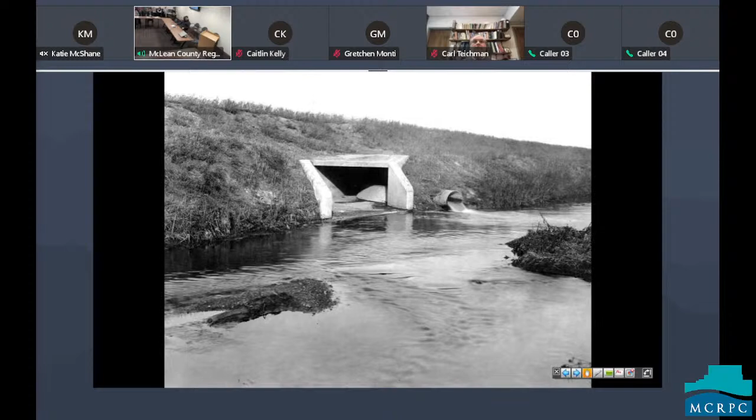So, as I said before, in the teens, Bloomington and Normal sanitary sewers discharged to Sugar Creek. You can see right here, that is raw sewage going into Sugar Creek. This is the overflow that would run when there's a storm. So that's normal sewage, and then this large pipe is a stormwater overflow.

How did I do that? I didn't know that.

Cool. So that's the combined sewer overflow, and that's how the sewers in town discharged to the creek. So the interceptor sewers that the district started building in the 1920s intercepted all those discharges. The combined sewer overflow stayed open. Next.

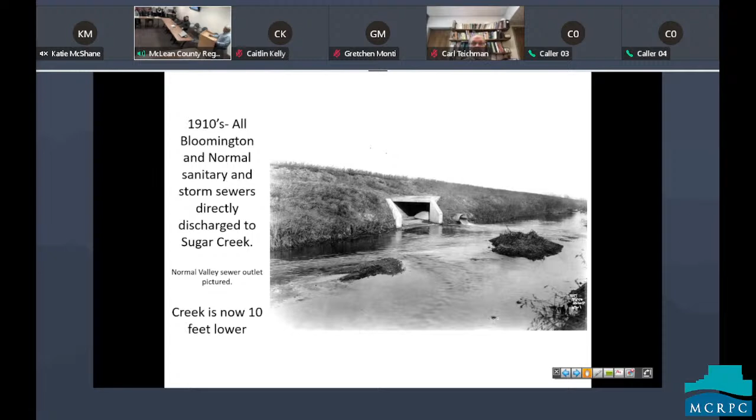So the district was formed under the Sanitary District Act of 1917. There are many districts in the state of Illinois formed under this act. Champaign, Urbana, Decatur, Springfield come to mind, but there's quite a few more. It was formed by a court order in 1919. People downstream of this community got tired of all the stuff that was in Sugar Creek, flowing past farms, and people, quite honestly, were getting sick.

There were about 200 people that died from disease in the 20s in Bloomington because there were discharges into the creek above the water supply in Bloomington and Normal. The water supply in Bloomington Normal is at about Division Street. You know where the water department is? They had a well there. Normal had one just upstream on the other side of the creek. And you had the hospital and everybody upstream discharging in the creek. So there was an outbreak, not 100% caused by that, but it was contamination of drinking water, cholera, and typhoid fever.

So in 1919, the district was formed. 4 referendums. I think on the 4th referendum, the district was formed and a bond was passed. And if they didn't pass that 4th one, the mayors of the 2 communities might be going to jail. I mean, they were threatened with jail time.

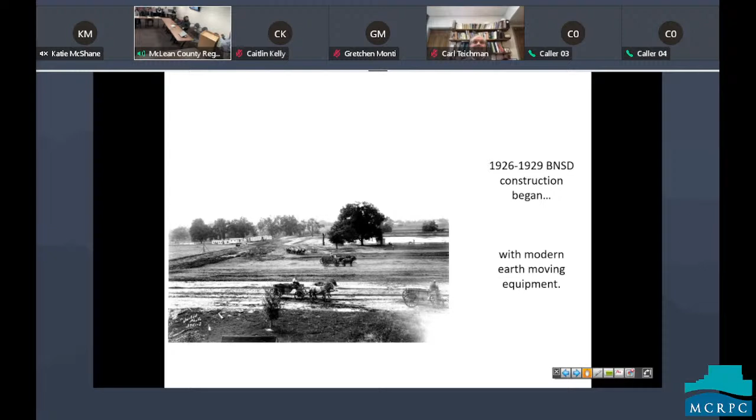1926 to 1929, we constructed a plant, modern earth moving equipment. Seriously, we got a boatload of pictures that show all the handwork that went in there. The concrete, it's incredible what those people do. Go ahead. Today, there's an 80-acre site in the West Plant.

The plant is divided into the old trickling filter plant, which we call Plant 1. There's a Plant 2, which is solids processing, and Plant 3, which is a third plant. This was the 20s, 40s, 60s, 70s, and 90s. And there's a little dab in there from 2007. This plant is capable of 22.5 million gallons a day on a daily basis, treating wastewater.

It treats wastewater, everything west of Veterans Parkway. In a storm, it can handle 45 million full treatment. And we can do an extended treatment to another 42.5. That's before we push it into the 80 million gallons. So just over 90 million gallons can run through, or 87 can run hydraulically through that plant.

There's 3 stages of treatment: primary, secondary, tertiary, and advanced disinfection on the tail end of it. And a lot of that's going to get bulldozed. I'll get into that in a minute. Next slide.

In 2000, construction was started on a plant down off of 700, which serves everything east of Veterans, just about. It's a 7.5 million gallon plant. It's got plans for expansion to 15. Cost $60 million, roughly. And at that time, that was the most expensive public works project funded by the local economy to date. You know which one was before that? The 1926 construction of the West Plant.

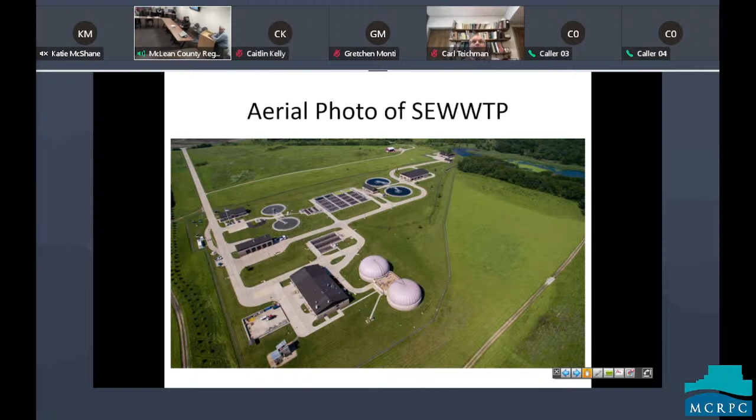A lot of milestones. So the first plant was 5.5 million gallons a day, 1926 and 1929. And at that time, the district established sewer use ordinances for Bloomington Normal. Now it's required by US EPA. We converted that 2-stage plant into a 3-stage and added disinfection and tertiary filtration. It's kind of like taking the 4-cylinder engine on your car and putting a 6 and then an 8 and then supercharging that engine.

So the district currently has capacity for full treatment daily average flow of 30 million gallons a day. Design max is double that, 60. So chlorine used to be a tool used for disinfection in the creek. Before this, we used gaseous chlorine, but it's a lethal gas, and it's a weapon of mass destruction used in World War I. And it does great. It kills all the germs. Not so good on the fish in the creek either.

So in the 80s, we got an exemption from using chlorine. By the way, chlorine is a very dangerous thing to handle at a plant. Whenever they're changing out tanks, you have to have 3 people that are masked up in SCBA equipment and ready to push the panic button if they get a leak, because it is bad stuff. So we got rid of the chlorine and then replaced it later with UV disinfection.

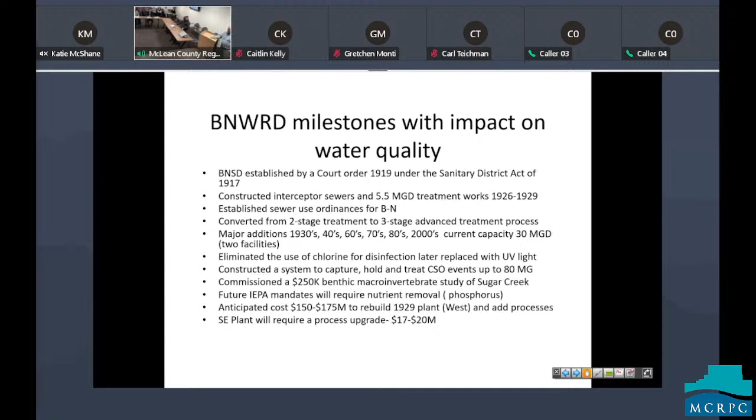Next slide. So we serve about 140,000 people, residential, commercial, and some stormwater. Industrial contribution is pretty small. It's about 3% of the total load. Got a high number of restaurants on this facility. That means grease. And we have 2 universities and colleges. And honestly, ISU and Wesleyan, when they're in, they're good for about 1.5 million gallons a day. So we do see it spike.

People have asked me, during the Super Bowl, when the commercials come on, do we see a big flush at the top? No, we don't see it. It takes too many factors to get there. Next slide.

So the user fee, this was last year's numbers. You pay $7.43 for the first 2,000 gallons of treatment, and then $2.06 per 1,000 gallons. And this is of the potable water consumed. I don't know what your water bills are running, but the BNWRD fee on the bills is 15, 16, 18 bucks a month. The fees just went up Sunday, I think, May 1st. And I think, don't hold me to this, but I think Tim said it was 5%. A big part of that is planning for this construction of the new, well, it might be 7. So it might be 30 cents a month, 35 cents a month more.

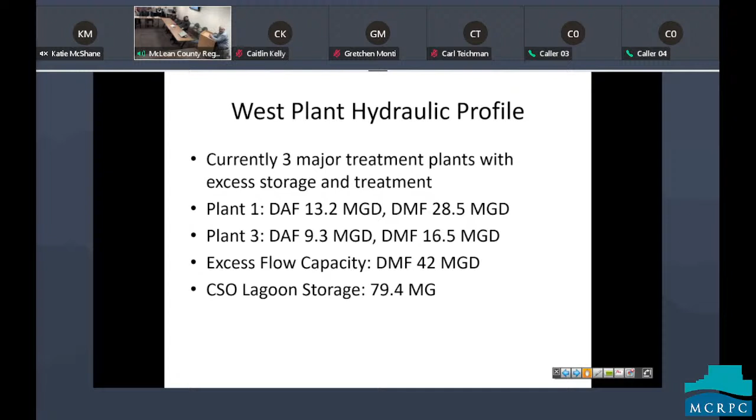Next one. Did you identify where the lagoon is? Pardon? Did you identify where the lagoon is in town? The lagoon is on West Washington.

Excuse me, right here.

So we have rules and regs to follow. The plant operates under an NPDES permit, National Pollutant Discharge Elimination System. It requires us to discharge 10 milligrams per liter, or 10 parts per million, of carbonaceous biochemical oxygen demand, bad stuff in the water that consumes oxygen. Total suspended solids is 12. Ammonia has seasonal limits. This is May, so we're in the lowest level of ammonia that we can discharge to the creek, which is 1.5.

Why is it seasonal? Fish are cold-blooded creatures. In the wintertime, their metabolism is much slower. They don't absorb or take up the ammonia as fast as they do at this time of year. And then you've got early life cycle going on in the creek right now, where you've got little fry being hatched. They're sensitive to ammonia.

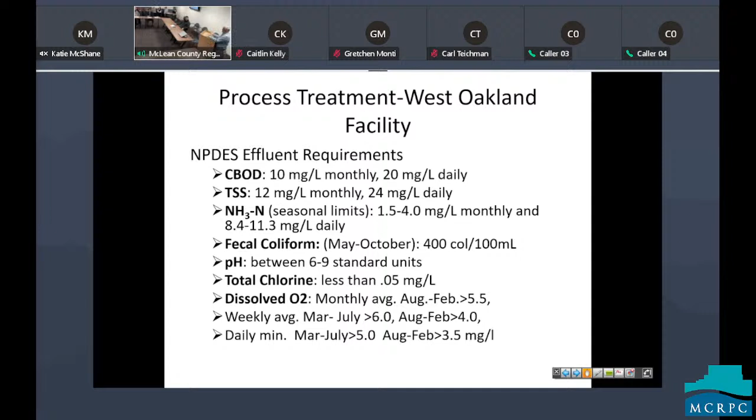Fecal coliform, 400 colonies. That's a pretty low amount, so we have to disinfect before discharge. pH between 6 and 9, and very little chlorine we're allowed. Dissolved oxygen, it's got to be fizzy. Can't have flat water. You have to go out to the creek with lots of oxygen because there are critters in the creek that need that oxygen. Next slide.

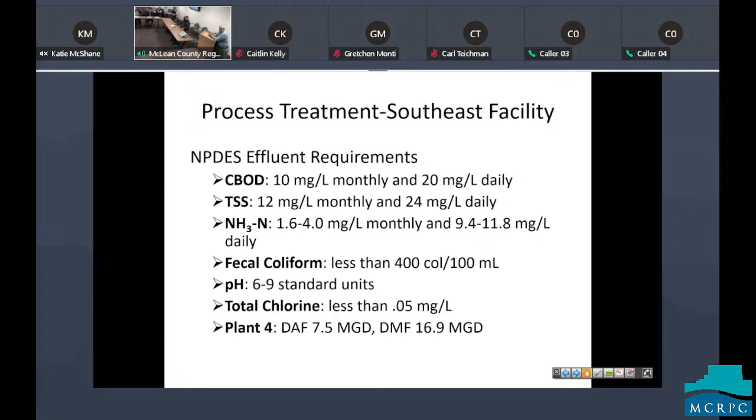Pretty much the same for the southeast. The biggest difference, this is year round. The west plant, it's May through October they have to disinfect. This plant, they disinfect year round. And of course, the capacities are smaller. Nothing else important here.

So the nuts and bolts of it, I'm sorry you can't see this very well, but we do mechanical screening of the water that comes into the plant. This removes all the debris that flows in. Any object bigger than 10 millimeters gets screened out and put into a dumpster. We also take out grit that comes in, sand and gravel. Then it goes to our aeration tanks. I'm sorry, it's kind of out of order. Mechanical screening, primary clarifier, goes to an aeration tank.

An aeration tank is like soup that we have a lot of air blowing into. And the soup is a concentrated, recycled wastewater. The bacteria that naturally occur in the wastewater are soil-based bacteria that break down the ammonia from ammonia to nitrate. It's a process that you have to manage. We have to make sure the bugs aren't too old or too young, and the actual bugs, you can see them under a microscope.

We like them about 8 to 12 days old. If they're older, they're not as efficient, like old people. They eat, they don't do much work. And if they're young, same thing. They eat, but they don't do too much work. You like the teenagers.

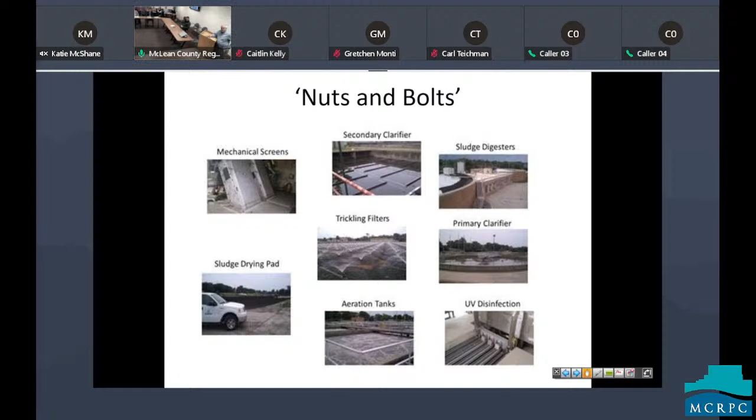So I told you about nutrients, phosphorus and nitrogen. Illinois has decided that wastewater treatment plants have to bring the phosphorus numbers down. What comes into the plant is about 5 to 6 parts per million coming in, and we knock it down to 2.5 or so going out. But we've got to get it down to 0.5. That's tough. We're better off than Decatur. They've got 30 coming into their plant, and they've got to get it down to 0.5. They've got an enormous task.

So you know what eutrophication is? It's all the water turning green, like in summertime you get a pond that turns green. That's kind of like eutrophication. So it's intended to keep the Gulf of Mexico from turning green. Agriculture is a major contributor on the watershed. So Illinois has said that agriculture is going to focus on the nitrates, nitrogen side, and wastewater treatment plants and point sources are going to work on the phosphorus side.

It's costly, large carbon footprint. There are chemical ways to do that. That's extremely expensive, and the chemicals are nasty. We want to stay away from that. Go forward.

We need to get rid of the leaky systems, the sewer systems in town. Leaky, when I mean leaky, water comes into them. There's a measure on how big your population is by the BOD that comes into the plant. That's the bad stuff, biological oxygen demand. And in some cases, the water and BOD is way out of proportion. There's too much water coming in, good clean water coming from storm runoff. When I say clean, it's not drinkable, but it's clean water. And that goes to the plant.

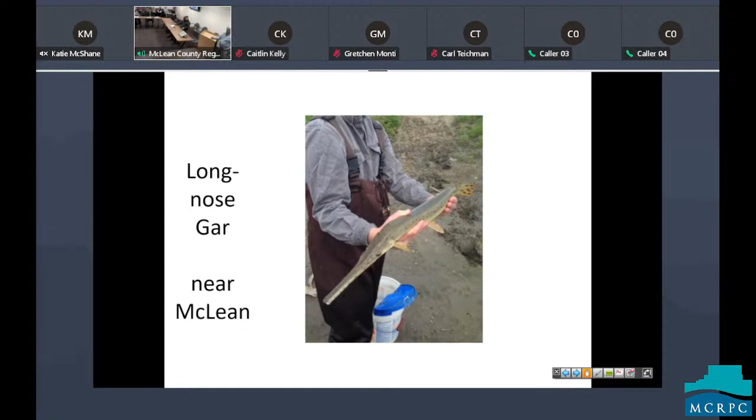Long-nosed gar. He's kind of an ugly fish. He's got teeth. He's got a big long snout on the front end. He's got an attitude also. But he is the top predator. He is the apex predator. If you got him, you got everything else underneath. His whole food chain's in that creek. Go ahead. That's a nice one. 36-inch. Probably 25 pounds. Go ahead.

And there's a scoring system for the fish index of biotic integrity in Sugar Creek. B plus, A minus for this creek. Probably lately it's been an A minus. It's this 80 million gallon lagoon that we put in in '07 to capture the stormwater that had a profound effect downstream on this IBI score.

Because when the sewers aren't used much, they collect trash and debris and nasty stuff. Then you get a big storm and it all flushes out of the system, goes in the creek. Well, that 80 million gallon lagoon stops that and made a profound impact. The other thing that made a profound impact is when, in the 80s, chlorine was stopped. So, questions?

You talked about generating methane and giving it to Cargill. Is there sufficient volume of methane that you could look at cogeneration, given the cost of your utility? Yeah. 1988, we put in 2 Waukesha methane burning generators. And by 1994, we shut them down. They were costing more to maintain than the cost of electricity that they were generating.